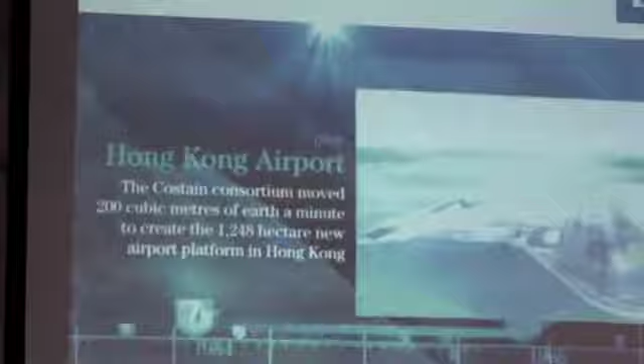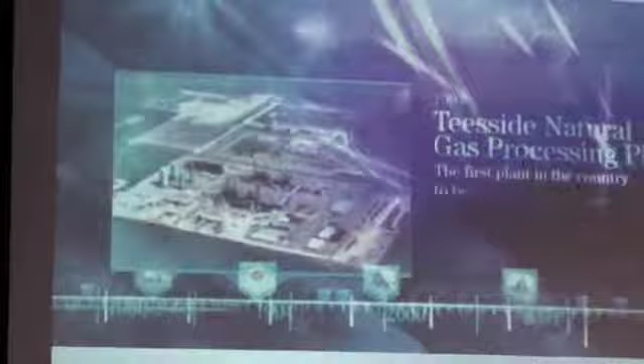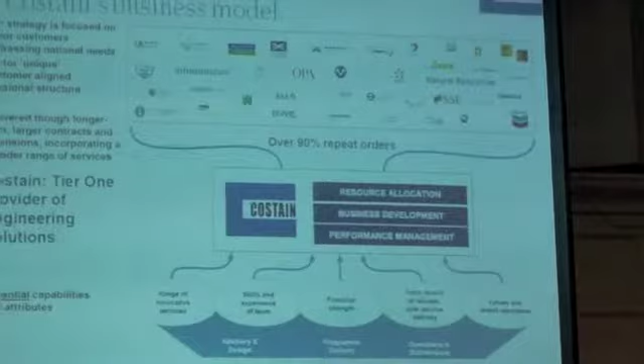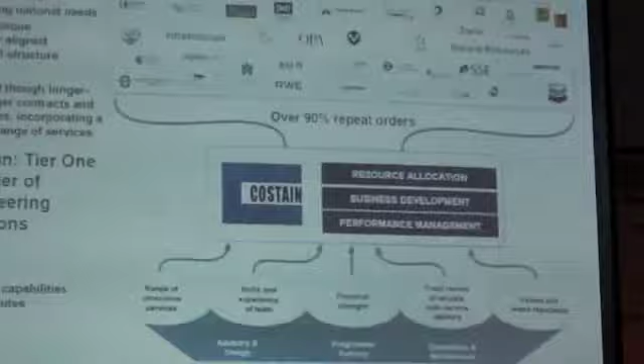As a business, we thrive on repeat order business. We work with a very narrow customer base - I believe 49 customers that we work with. We don't chase work outside of that narrow base, and we work with these customers to deliver solutions to meet their needs. A lot of these customers are the lifeblood of Britain - it could be the Highways Agency, Network Rail, or one of the utilities companies.

So today I thought I'd talk to you about Crossrail. I'm sure you're probably all aware of Crossrail, and these tunnel boring machines are making their way through London as we speak. The benefits Crossrail will provide are significantly improved connectivity from Shenfield right the way through to Maidenhead.

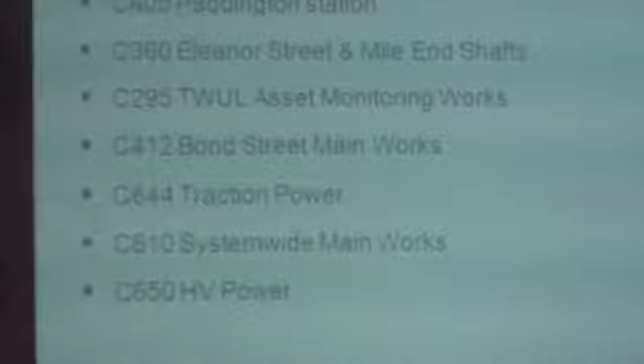Crossrail for Costain has been rather fruitful. As you can see, we've got a whole list of Crossrail contracts, which makes us the most successful construction company with Crossrail. We've got over £400 million worth of work for ourselves in joint ventures, which probably equates to over £1 billion worth of work. So significant for us.

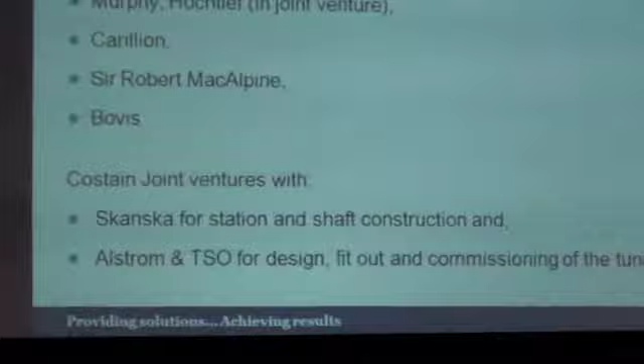Some of our competitors haven't done quite so well as us. It's worth saying that all of these projects we're working on are in joint venture, and the reason for that is Crossrail were very explicit that anyone working for them will be in joint venture, to ensure the public purse is spread as far as possible across the construction industry. So we're working with Skanska, a Swedish company who are very similar in culture to us, so we work very well together.

If you're not aware, Crossrail is a £15.9 billion investment - significant investment - and will significantly improve journey times across central London. For example, from Heathrow through to Liverpool Street or Canary Wharf can be done in under half an hour. At the moment, Heathrow to Paddington is about half an hour, and you'll be able to do this journey on your Oyster card rather than having to buy a ticket as well - cost savings for customers.

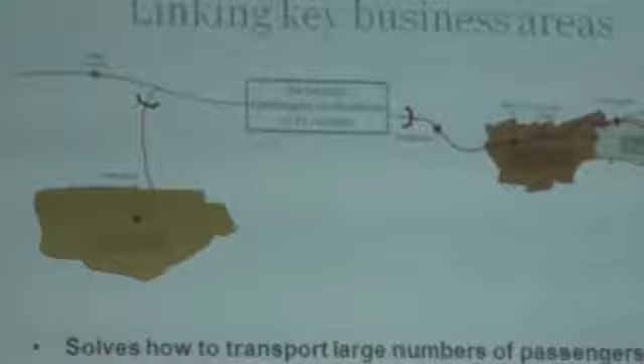You can see it links key business areas, but one of the major key points is it brings an additional 1 million people within an hour of the centre of London. So that's a significant benefit - there's a spread benefit of £40 billion worth of investment generated from this £15.9 billion investment.

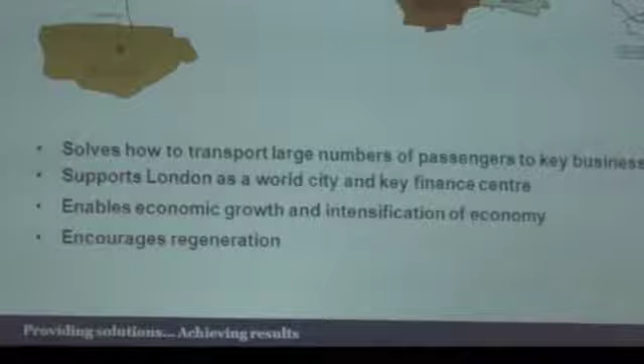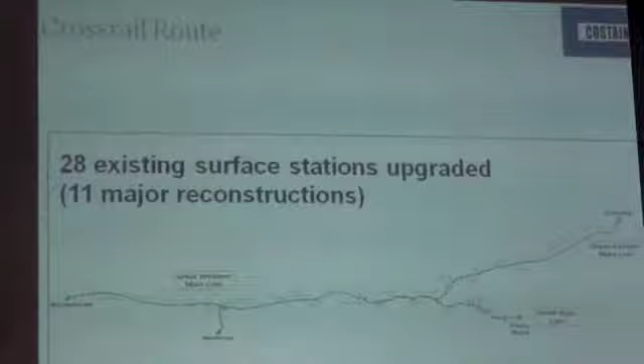So you see there's 28 stations, 11 reconstructions. On the spur from Liverpool Street to Shenfield, construction work is in the pipeline and will be coming in the future. That contract hasn't been let yet, but we've put a solid tender in for that, so we're very well forward with the working on construction.

In principle, in the centre of London, there are 2 tunnel boring machines, each working a tunnel, running straight through central London from Royal Oak, just to the west of Paddington, through the centre of London at the moment, progressing well.

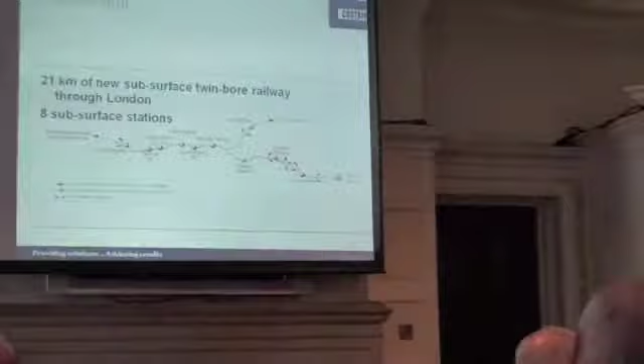Although it wasn't our project, you have to be impressed with the engineering at Tottenham Court Road. The tunnel boring machine went through about 70 centimetres above the Northern Line, whilst trains were still in operation.

Did you say centimetres? Here. Oh, can't hear very well. We can't hear you, sorry. We can get that thing turned on.

The tunnel boring machine ran approximately 70 centimetres above the Northern Line at Tottenham Court Road. So incredibly close. It's quite a scary thought - one wrong calculation and that could be very, very bad.

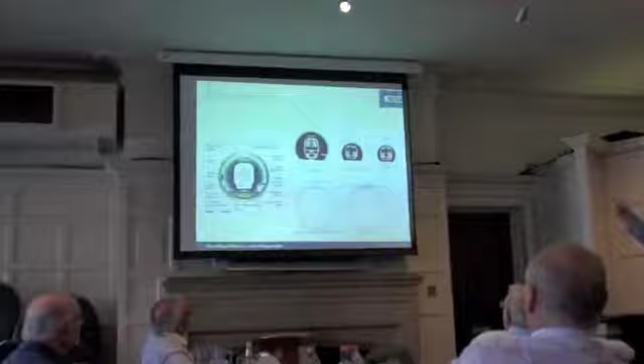The new Crossrail tunnel is 6.2 metres in diameter, which gives an idea in comparison to the Channel Tunnel, that it's getting on to that sort of scale, but actually much larger than the current tube lines as well. So this will significantly improve ventilation on the tubes.

Glossing over the scheme-specific stuff, in Paddington we're contracted to build this new station, adjacent to the Paddington mainline station. It's a £270 million contract, started in February 2012, and we're due to hand the new station over in September 2018 - although I think Crossrail are trying to push that to 2017. That's another story.

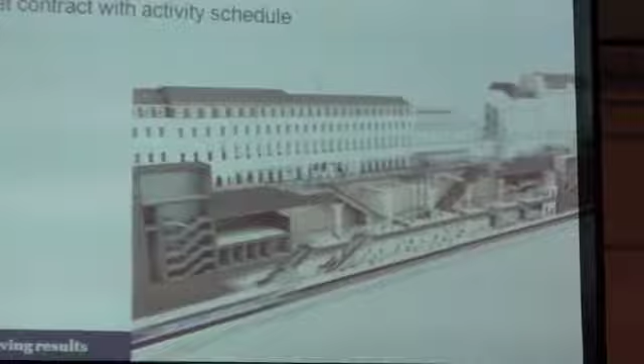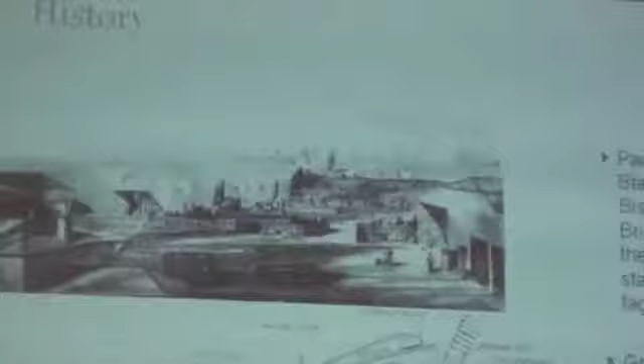Paddington is, from an engineering perspective, a place that we're all particularly proud to be working. Paddington Station is a Brunel structure, first constructed in 1846, relocated to its current location in 1854. It looks very similar to what it does today, which presents us with a massive project risk - it's a Grade 1 listed building, and working so close to that, we have to be incredibly careful with what we do, especially given we're digging an enormous hole right next to it.

This is Eastbourne Terrace, the road adjacent to Paddington Station. I put this picture in because when we closed Eastbourne Terrace to begin construction in February last year, the view was actually very similar to that - no horse and cart, that was buses and taxis, but the layout was very similar. The buildings are still as they are now, so it's quite an interesting view.

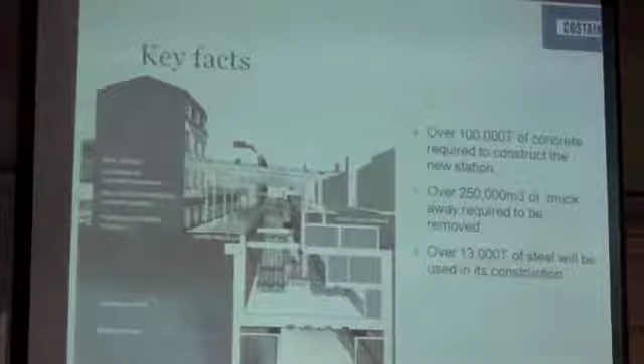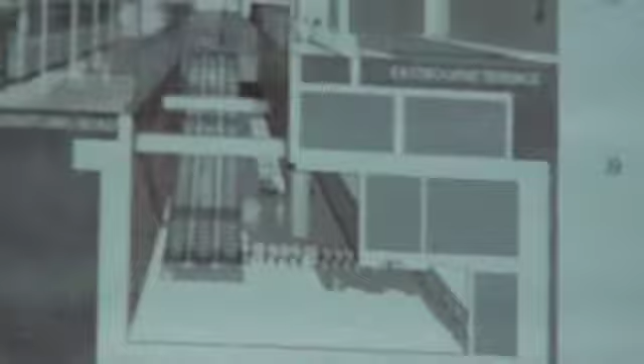So what we're building is this - you see that's Paddington Station on your left hand side, and there's this box underneath the road, 250 metres long, 30 metres wide, 30 metres deep. That's about a 250,000 cubic metres excavation. At an approximate mass of 2.5 tonnes per cubic metre, that's quite a significant excavation we've got there.

There's a nature reserve, an RSPB nature reserve called Wallasea Island, off the South Essex coast. The nature reserve is out in the estuary and has had issues with coastal erosion, so it's gradually going under. All of the excavated material from Crossrail, including the tunnels and other stations, is going to this nature reserve to raise its level, so they're able to prolong its life.

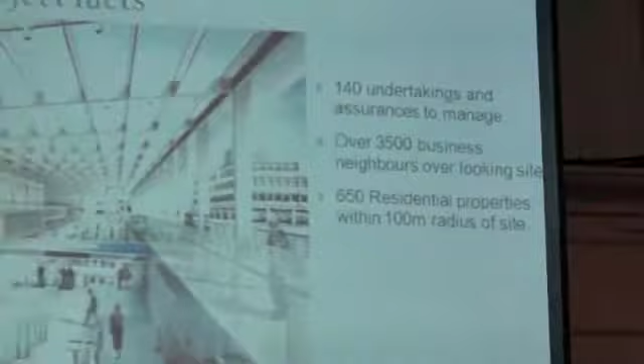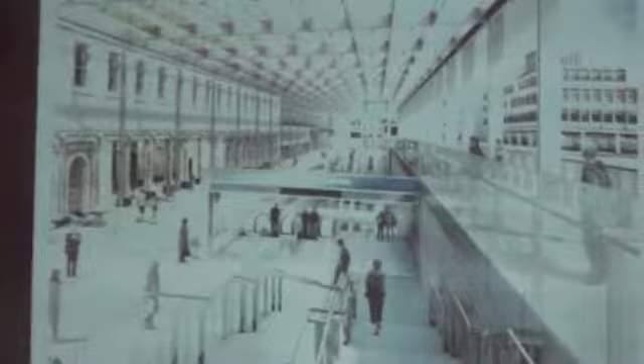To get a project like this off the ground, Crossrail had to make 140 legal commitments with its various neighbours. Some of these are quite arduous, some more trivial. That might mean Crossrail needed to guarantee a noise mitigation package should the noise get above a certain level, meaning properties are eligible for noise insulation or new windows, that kind of thing.

We have about 3,500 businesses looking down into the construction site at any one time. I'll show you shortly a picture of the site, and you'll realise we are surrounded on all four sides by multinational corporations, some of them engineering firms who believe they know how to do it better than us. That in itself presents us challenges as well.

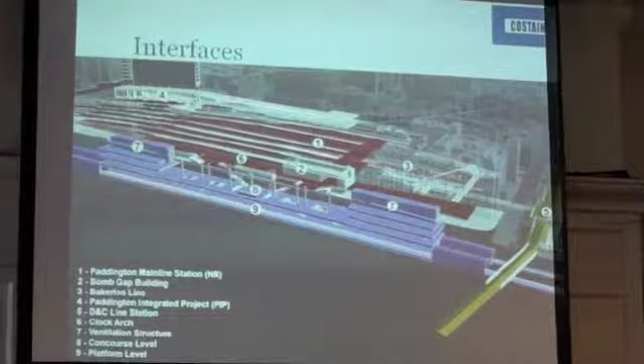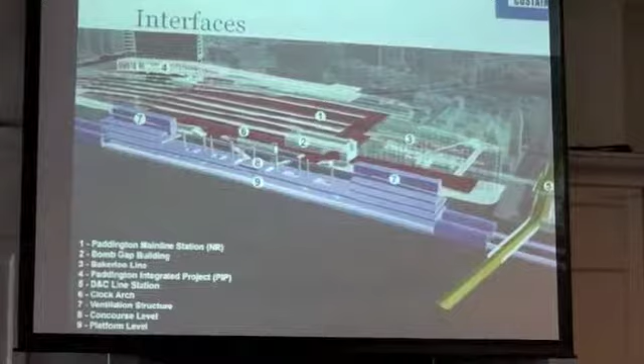Some of the interfaces - this is the box in purple. The tunnels will run through in parallel, underneath the District and Circle line at the end, so not quite as close as the Northern Line, but still reasonably close, within a couple of metres. There's currently talk as well to create a link across underneath Paddington Station to the Bakerloo line, which is on the upper right-hand corner of this screen.

That again presents its challenges by tunnelling underneath Paddington Station, which is very well listed.

You see the building stops there and is much lower here. That used to be the same height all the way along, but the Second World War took care of that, so there's a bit of a gap in the building.

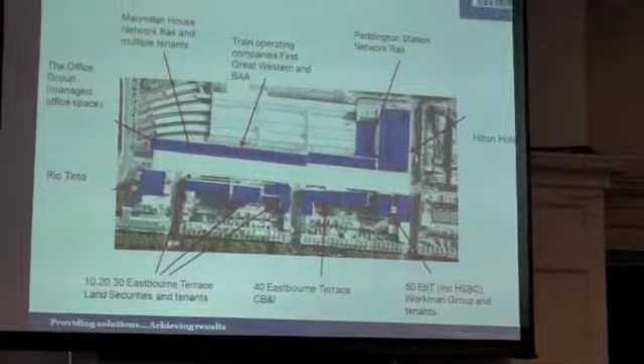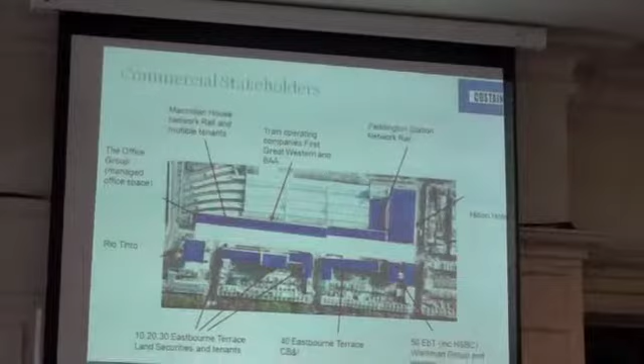As I mentioned, that's our construction site in white, and all around us we have these multinational corporations who present us a significant challenge. A great deal of my time is spent talking to these companies, making sure we live up to the agreements made in planning, and ensuring there's continuity for their business as well, so we don't end up paying compensation.

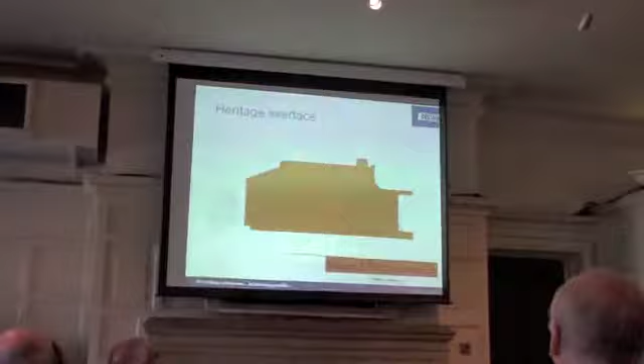That's a plan of Paddington Station, as mentioned. In that whole footprint, that's a Grade 1 listed building. One of the things we need to do to safeguard our project and also safeguard the building is to install monitoring points over it.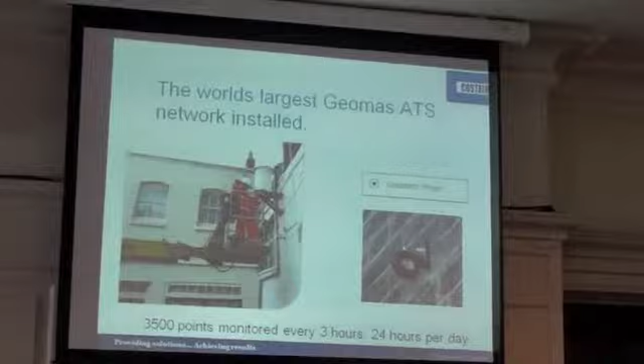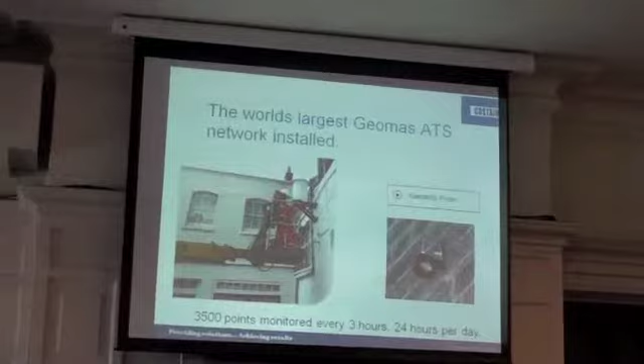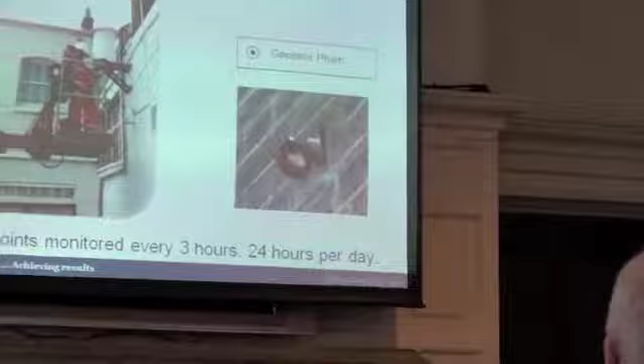This lets us determine any movement of our building at any given time. There's quite a clever system in place where if the building even moves by a fraction of a millimetre, alerts are sent to various members of the team via their mobile phone by text message, and emails are sent out to a wider pool of people in the office. We probably have about 25 people monitoring properties and buildings in the local area on shift at any one time, every day of the year, 365 days a year.

So if we even slightly damage that, we're talking fines, personal fines in excess of £30,000, and a trip to prison for the director. This is really scary stuff.

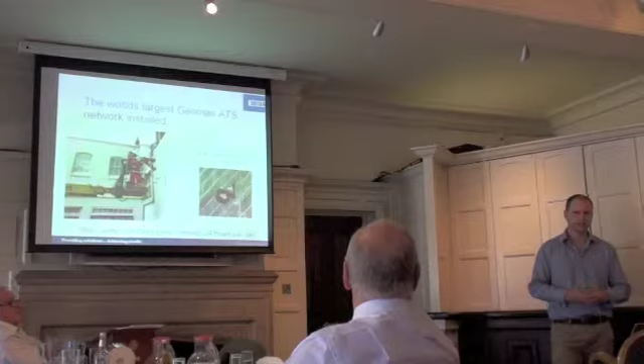We've carried out assessments and calculations, and we're expecting settlement in the region of 2 to 10 millimetres because of the excavation. It sounds high, but in brick structures that can actually be quite easily tolerated, as long as it stays within those parameters and doesn't all move at once. If it moves that much at once, we've got a big problem.

On our high-level construction programme, the headline figure is that we need to reopen the road on the 14th of February 2014, and then continue work underneath the road. Our completion date is September 2018.

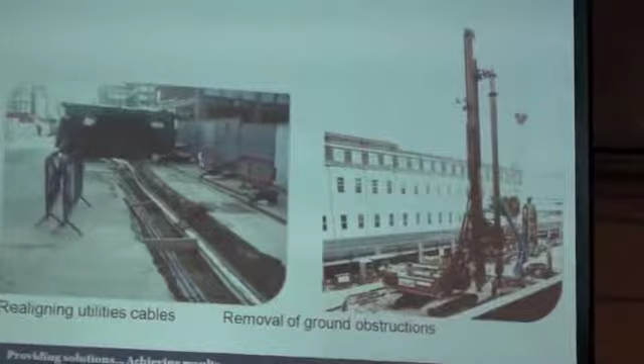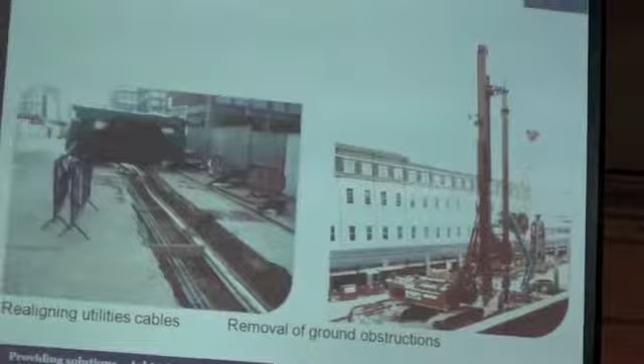So just to run quickly through the journey: on the 13th of February last year we closed Eastbourne Terrace and very quickly ran into a few problems. One of our competitors had been in the road for 2 years previously re-diverting utilities, so when we landed we should have had smooth digging and no obstructions. But we found utilities cables for the local hospital, the train station, and about 10,000 local residents, so obviously they hadn't done their job. That added 6 months to the beginning of our construction programme.

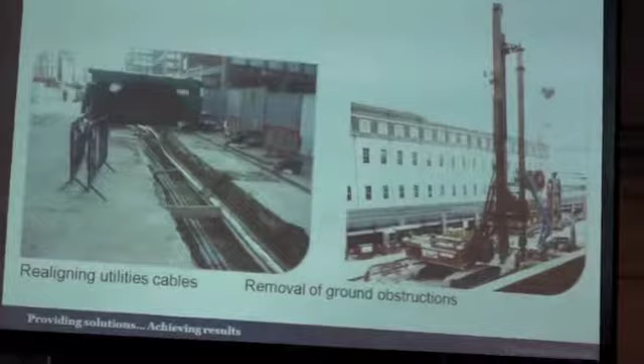We also had to remove ground obstructions, using this auger rig here. Eastbourne Terrace was built up on a Second World War bomb demolition field, so we needed to use the auger to break up these large lumps of concrete.

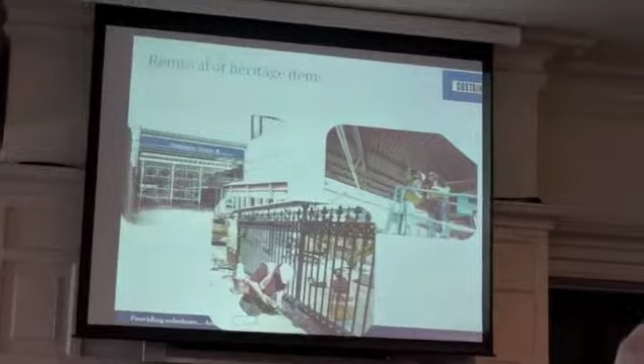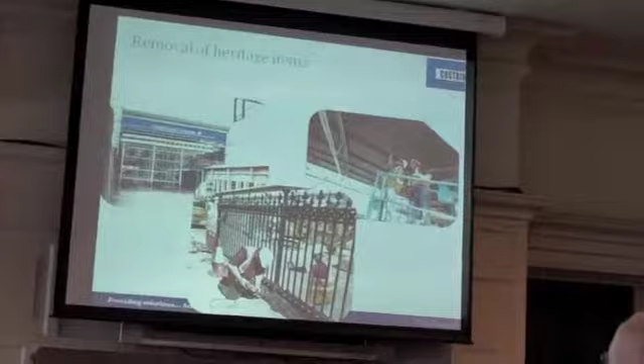We then had to painstakingly remove a number of pieces of street furniture and the old canopy. A lot of these dated back to the 1850s and had to be carefully removed by hand. The canopy had asbestos, which added an extra challenge to this heritage piece. All of these have been taken away for storage. The railings will come back into the final scheme, and the trusses from the roof will be taken away to the museum.

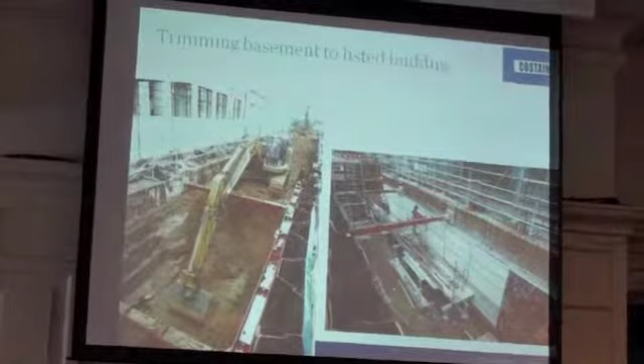But this one added an extra dimension to our construction project. The basement of Paddington Station by the Hilton Hotel protruded underneath the road by about 3 metres, and there was a clash of about 1.5 metres with the design of our new station.

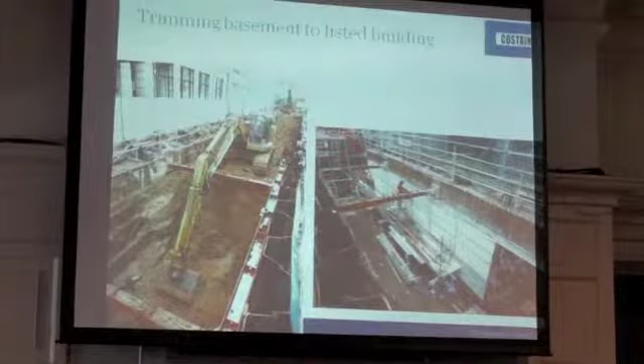So this presents you 2 options. You either go back to the drawing board and redesign the station, making it slightly narrower, which is already an incredibly narrow station, or you come to an agreement with the owner of the basement and you chop off part of their basement and build a new wall. So of course we took that option.

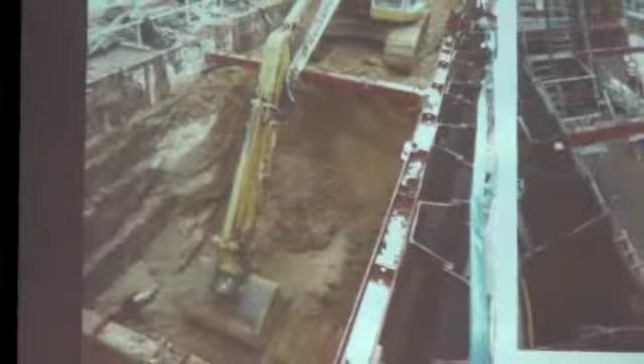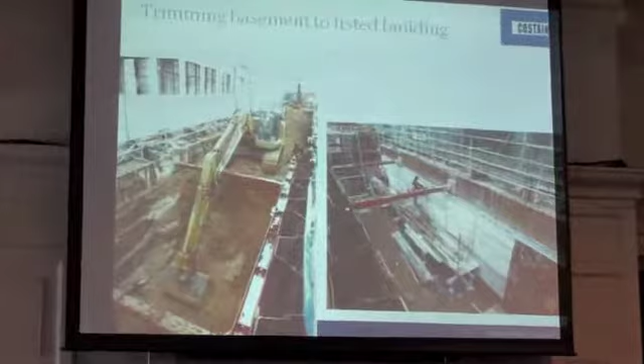So you can see here on the left, excavating down about 4 metres and then refacing this brick structure with reinforced concrete face. This work was really our first piece of major construction, and incredibly challenging, bearing in mind that there are still people within the hotel above - London's busiest Hilton hotel. They tell us it runs on about 99% occupancy the whole time. So for us, that was a real challenge.

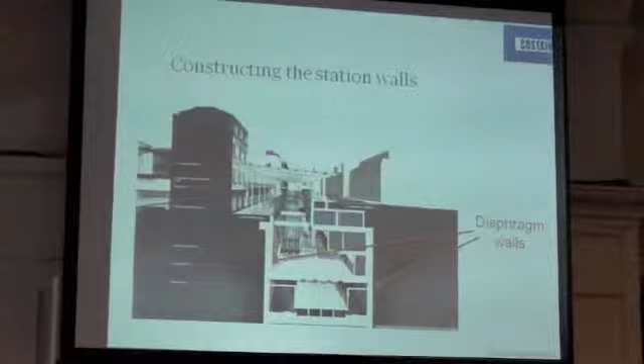So the next port of call is to actually construct this box. So we constructed what we call diaphragm walls, and they run around the perimeter, so 250 metres round and 30 metres deep into it.

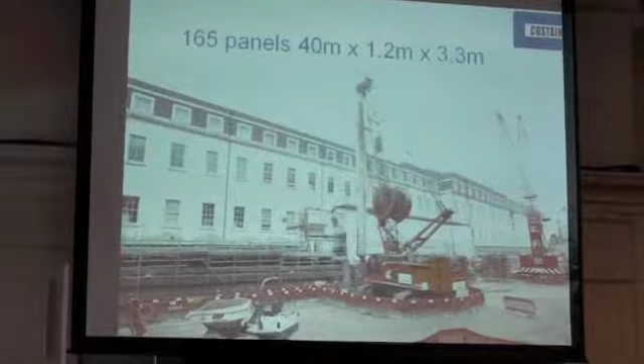These are constructed out of 165 individual reinforced concrete panels, excavated by one of these rigs. They're about £3 million each. We had 3 of them on site.

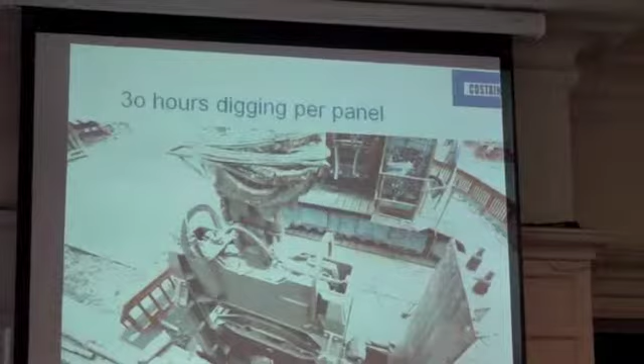It's just got a clamshell jaw which digs down in between 2 shallow concrete guides that we constructed in the ground. It took us about 11 months to complete this one activity.

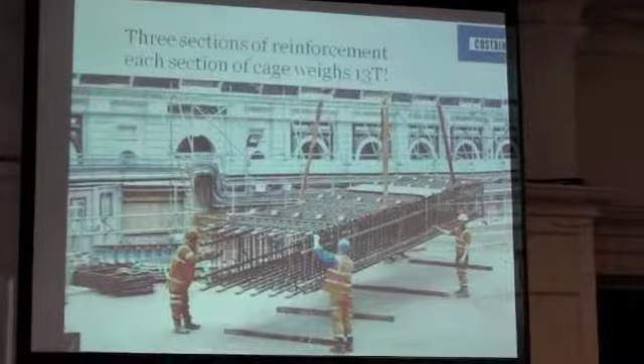Okay, you can see 3 sections of reinforcement at 13 tonnes each. In places, again, only a few metres away from a Grade 1 listed building. So the skill of the operator was particularly impressive. That archway on the building there, that is the door into Queen Victoria's private waiting room. So, massive risk.

Also, we then had to construct the columns that run down the centre of the station and will support the new roof. There are 51 of these, 60 metres deep. So using another large auger rig and installing those.

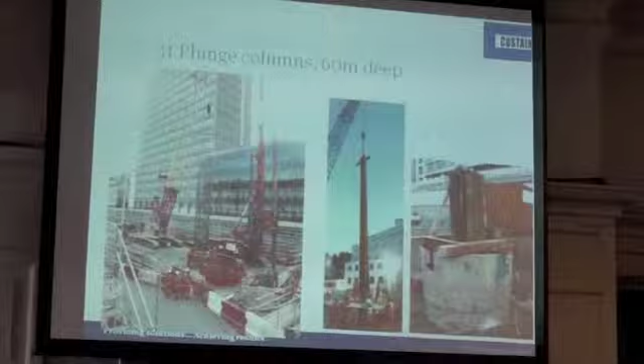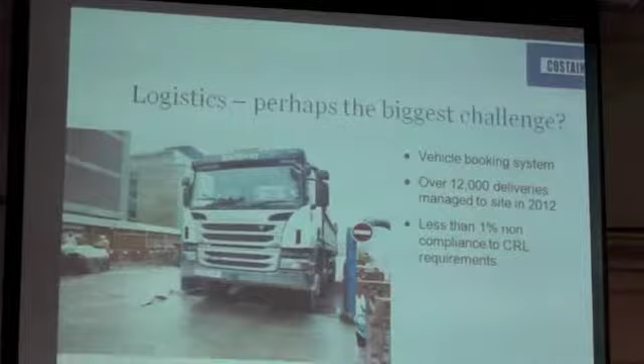A massive challenge to us is logistics. Our construction site is incredibly narrow. When it comes to February next year, it will be even narrower. But to give you a bit of a feel, last year we had 12,000 deliveries coming into our construction site.

And Crossrail has a particularly strict code of conduct for its vehicles. They have to be compliant with reversing cameras and additional mirrors, and also has to have a warning beacon to protect cyclists - if they want to ride up the inside of the vehicle, they'll know if the vehicle is about to turn left.

So we had less than 1% non-compliance to this, and just to give you an idea as to how strictly this is enforced, it does not matter what's being delivered, it doesn't matter how critical it is to the programme, if that vehicle is not compliant, it will be rejected. We have lost time because of that, but it absolutely is the right thing to do. I believe our supply chain have got the message.

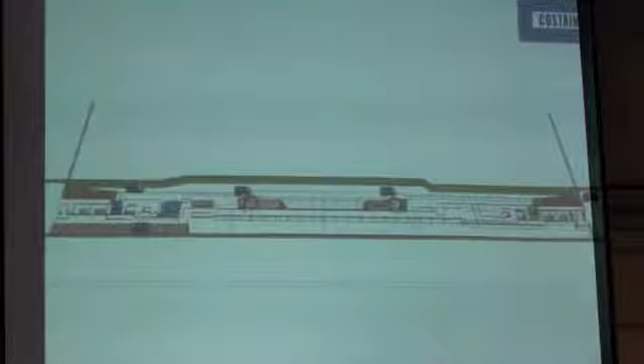So constructing of the roof. We've built the box around the outside. We then begin to construct the concrete roof slab. So you're probably thinking you haven't actually started digging yet, and that's correct. As you see, the roof slab progresses through the construction site, and the gap in the middle is the mole hole where we start to begin excavation.

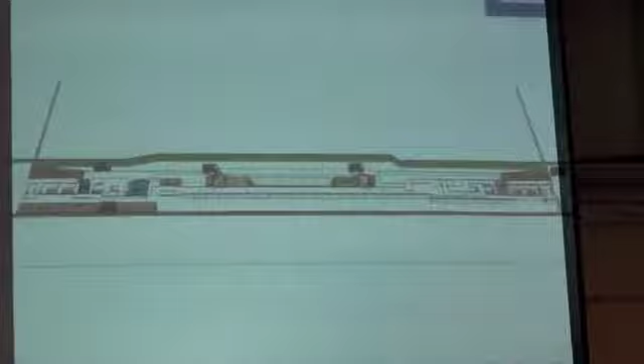At the lower end of the site, we then decided to come back up and reconstruct the road as well for February next year.

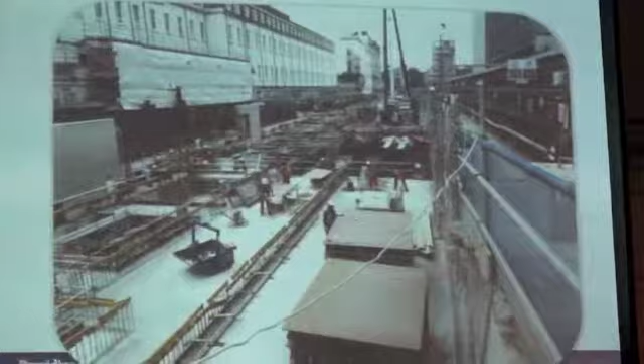So to give you a better idea, this is taken last week. This is the construction of the roof so far. It's a heavily reinforced structure, about 1.5 metres thick with some pretty hefty steel bars. And guys pouring concrete there.

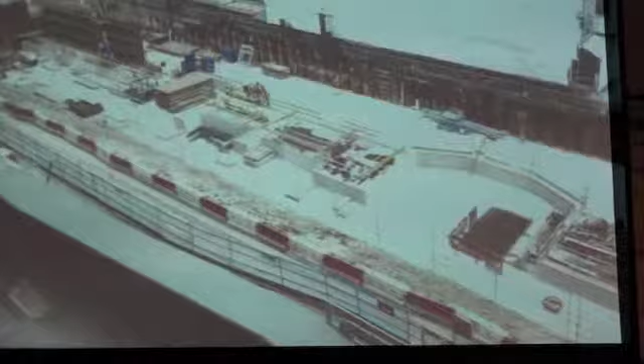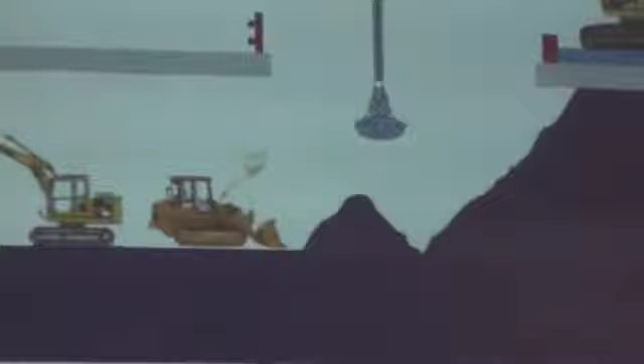So our next milestone is to commence the excavation underneath the roof, and we are due to start that next week. The logic is that we'll excavate from the surface until it's deep enough to put an excavator down into the hole, and as we progress down, you'll increase your plant. It'll always be lifted out from the surface, as you can see here.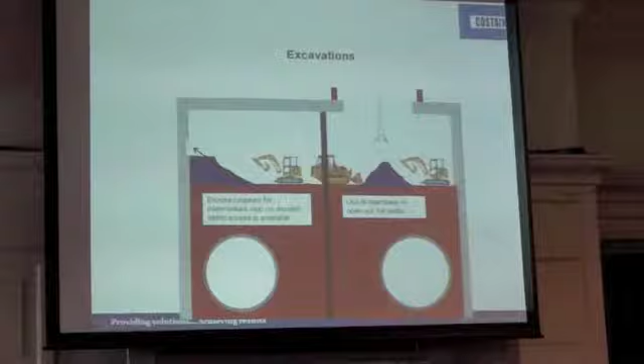Then we work our way down to the tunnels. So the 2 tunnels passed through late last year and early this year.

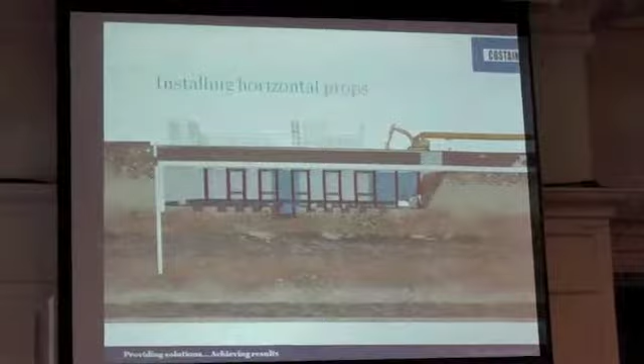Our significant challenge is to get down to the tunnels where we can break in and begin construction of platforms. So this gives you a bit of the logic from section view. As we progress down, in red are the tubular columns we installed. We then put in the blue props, which prevent deflection of the side walls of the station, and those remain until we start to construct the -1 and -2 levels of the station.

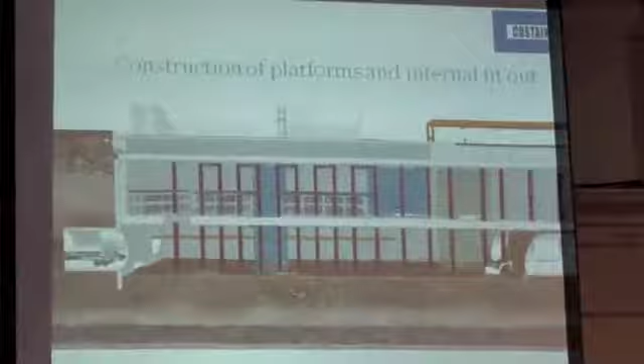As you can see there, we're able then to take away the props and get down into the tunnels that you can see there. We then start to fit out the station, so this is when all the big plant, all the ventilation, all the power comes in, and the contractor comes in to fit out the platforms and lay the tracks.

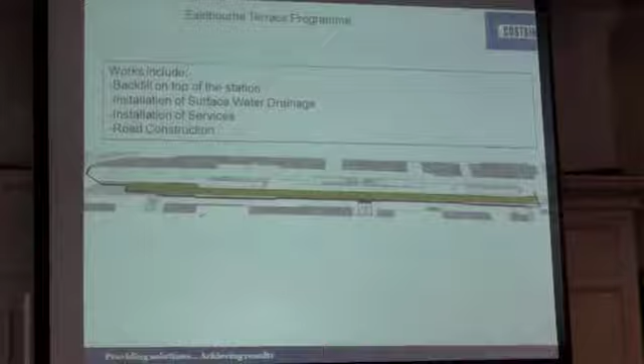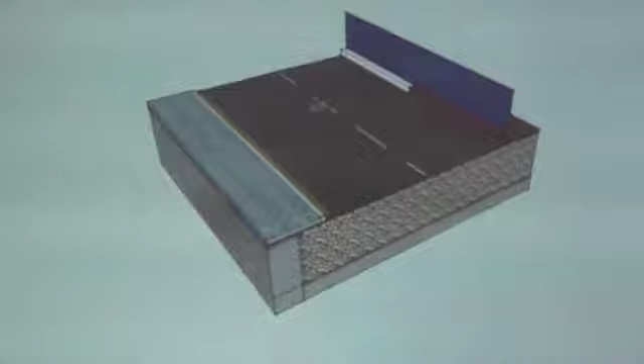To get us to February next year - politically it's a big milestone. We need to open the road in February '14, otherwise our name will be mud with Westminster, and Crossrail as well. We need to put a waterproof membrane down on the roof slab we've just seen, lay the services, backfill it, reconstruct a new pavement, lay the road, and then install the hoarding to be able to reopen the road.

Now we've got about 6-7 months to go, and the pressure's really on. We really are under the cosh at the moment, so I think there's going to be a lot of late nights spent to ensure that we hit that target date.

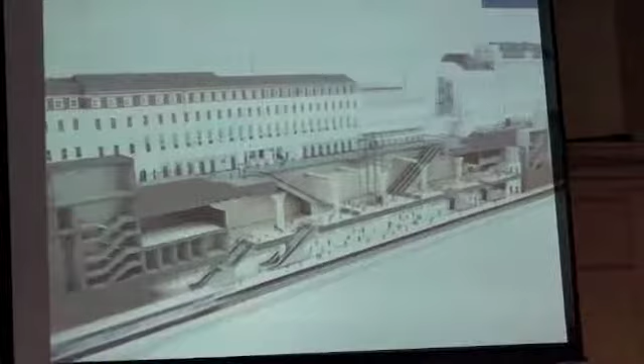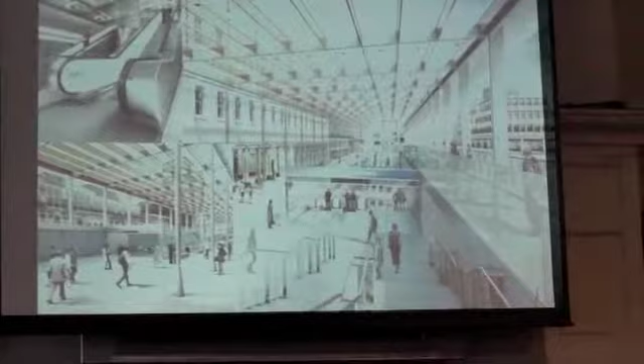And that is what it will look like once we're finished. So just giving you a few of the artist's impressions of the new station - you've seen that one, looking down, see it steps into the new station. There's a glass canopy along the top. The idea of the new station is to provide as much natural light as possible by being in an open space.

It will be significantly more ventilated as well, so it should have a really nice feel. And actually, from the inside, it will look very similar to the Canary Wharf Jubilee Line station, with the exception of the natural light.

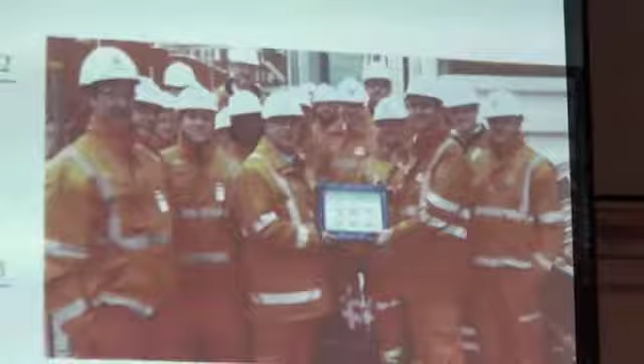As with most construction companies now, health and safety is incredibly important and something we're incredibly proud of - achieving a ROSPA Gold Award for our contributions to safety for the last 2 years. That's a massive team effort, instilled right through our supply chain, and is an obligation on everybody. At least once a week, every member of our team has to go out on site, no matter what their profession is, so they fully understand where they're putting the men at the coalface and understand the implications of their decisions.

We also spend a lot of time working with our communities to make sure we put things back, because actually we're an uninvited guest in the communities we work in, so it's important that our time spent is not entirely negative and we can provide some positives as well. Some of the things we've been doing are redecorating the local school, guided reading programs at schools, cooking at homeless shelters, and redecorating the gardens at a local nursery which were ransacked by local gangs.

And like you guys, we're very keen to raise money, and last year we rode from Shenfield to Maidenhead, raising £6,500, following the new route of Crossrail. That was a sore day the day after.

Any questions? You mentioned earlier on the rail aspect - you've been talking primarily about construction work in the centre. What's actually happening between Shenfield and Liverpool Street, for example?